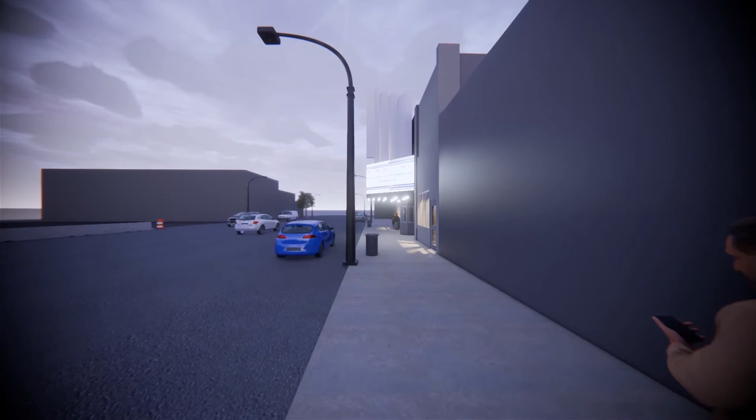About a year ago, we sat together in the Fox Theater and made our first presentation to a gathering of residents interested in seeing the grand old theater transformed for the 21st century. Perhaps you were there. If so, some parts of this presentation will seem familiar. Bear with us while we bring the others up to speed.

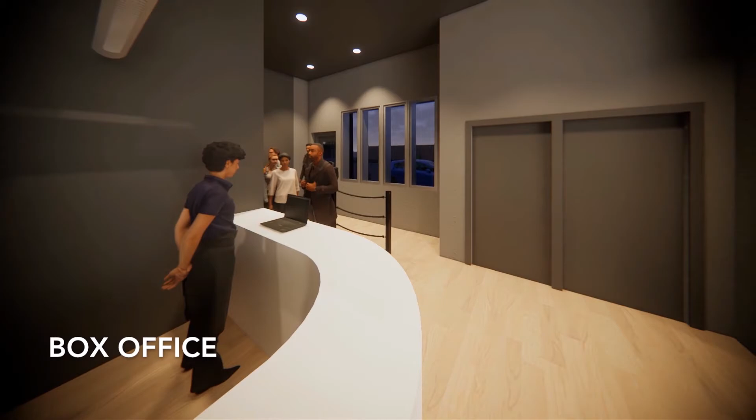There's a rich history that accompanies this theater, and we'd like to make sure you know all about it. We'd also like to share with you the considerations that we used to create the designs you will see. For those of you just joining the process, welcome aboard. There is surely room for all of you.

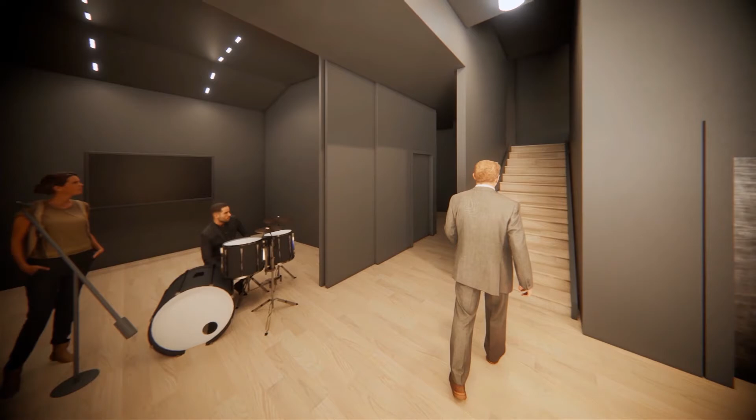We listened to your comments and concerns, and tonight have a series of 3 concepts to show you that will hopefully bring us one step closer to the transformation of the theater that you want to see.

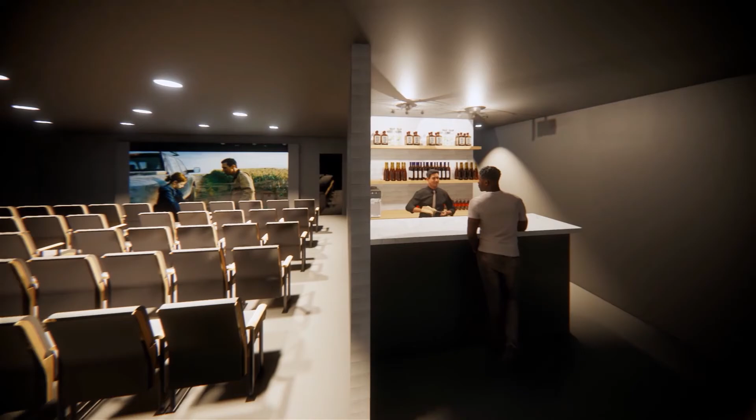I wish we could all be together in the auditorium tonight to allow our imaginations to run wild. But even though sitting in a theater together seems a long way off these days, with a little work now, we can use this downtime to refine our concepts, secure funding, and get this building ready for its sequel.

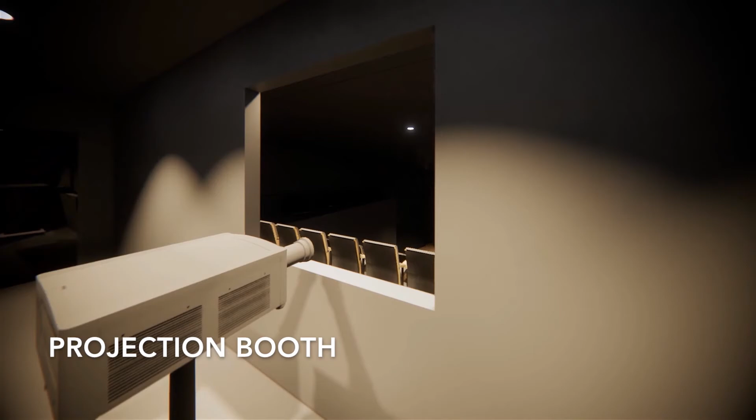We will look at 3 concepts. One with minimum changes to the footprint, but with modern restrooms and other amenities for the comfort of our guests. We will also look at a scheme with a more deliberate series of interventions, all within the confines of the existing building. Finally, we will present to you a scheme that not only includes a major theater renovation, but also an addition, making way for a future theater complex that will serve as a conference center and event center as well, serving a wide variety of needs for the community.

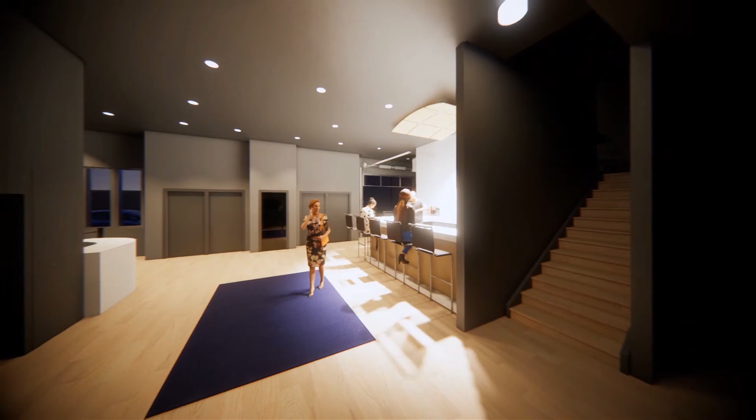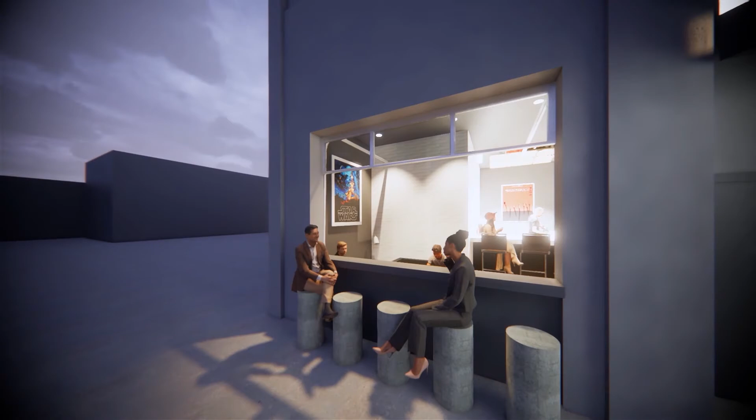We will also entice you with the thought of an outdoor theater, just the ticket for a warm summer night under the stars with an old family favorite on the big screen. Think of it, kids running around while mom and dad recite every line from a movie. And then settling down on a blanket or sprawled out on the lawn, the smell of popcorn and hot cocoa filling the air, while passers-by slow their cars down to see if they can guess the name of the movie just by the image on the screen.

This is the new Fox Theater in Walsenburg, and we're glad you could make it.

In order for the Fox Theater to remain viable in the future, we need to find better ways for it to make money. Primary among these objectives is flexibility. We'd like to be able to toggle between movies and live performances. We'd also like to enhance the visitor experience with better food, maybe a cafe, and concessions related to either the performance or the film being shown.

We'd also like to give people multiple reasons to visit, not just for a movie, but maybe some live music in the cafe and the lounge area of the lobby. We'd also need a smaller cinema for showings of new releases after they've been screened several times and they were playing to like a half-empty house or less.

Also, there's a need for a backstage green room for live performers to wait before their act or after the act is over. Finally, we'd like the renovated facility to become a hub of activity for the entire community. Perhaps you drive by on an evening and see something going on in the lobby, a performer you know of, and you want to stop and join in the party.

In addition to traditional performance and theatrical events, the theater could be made available for trade shows, exhibitions, and art shows, as well as for public meetings, much as it's used today. In the future, perhaps, a conference and event facility might be developed, which would allow those sorts of events to go on without disrupting film showing schedules.

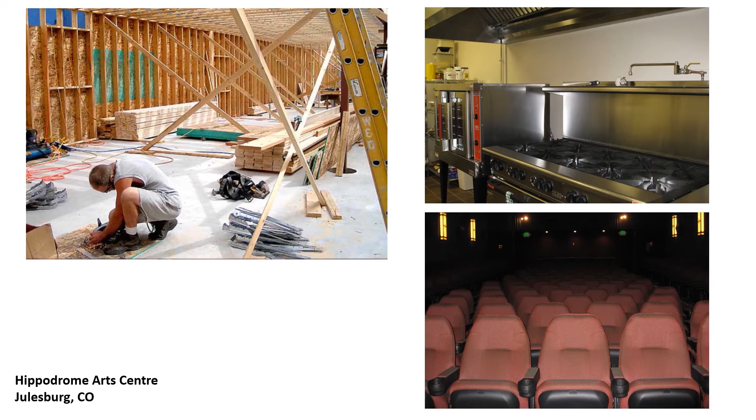In 2012, the lobby and concession stand took on a whole new appearance as both were completely remodeled. And in 2013, the digital age arrived as the Hippodrome made the conversion from the carbon arc to the new projector system. Today, the Hippodrome Arts Centre continues as a centerpiece of community life and activities.

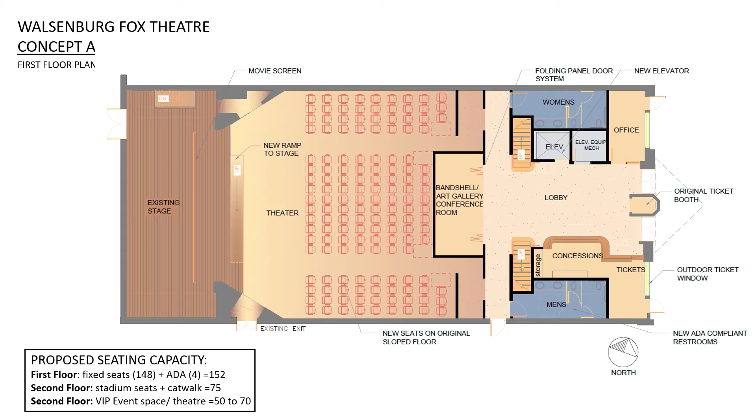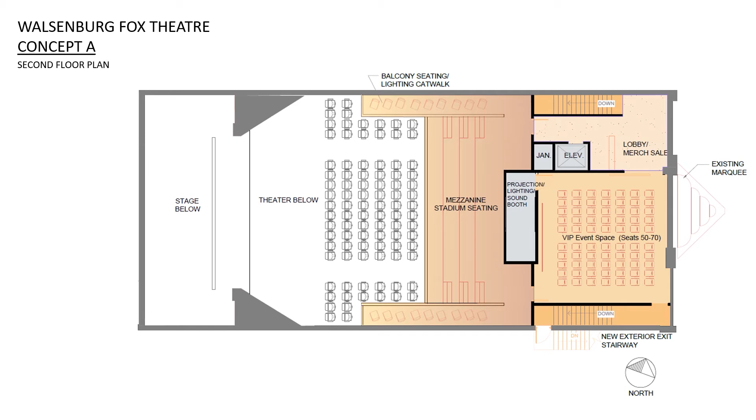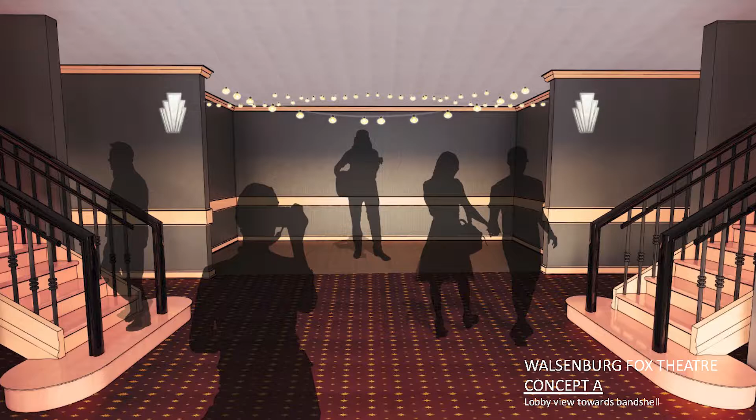This conceptual image provides a snapshot of the lobby experience and the proposed bandshell that would open up, expanding the lobby space, allowing patrons to enjoy pre-function activities before the main event in the theater. The bandshell could be used as an art gallery, or closed off and used as a conference room or small classroom. The lobby decor and stairs would be a nod to the theater's earlier Art Deco appearance and elegant ambiance.

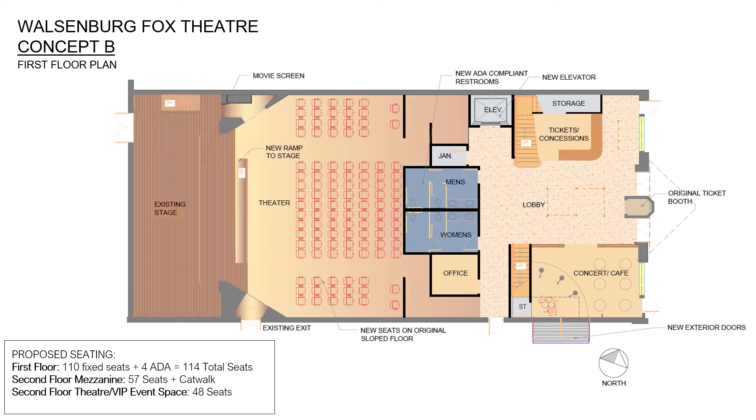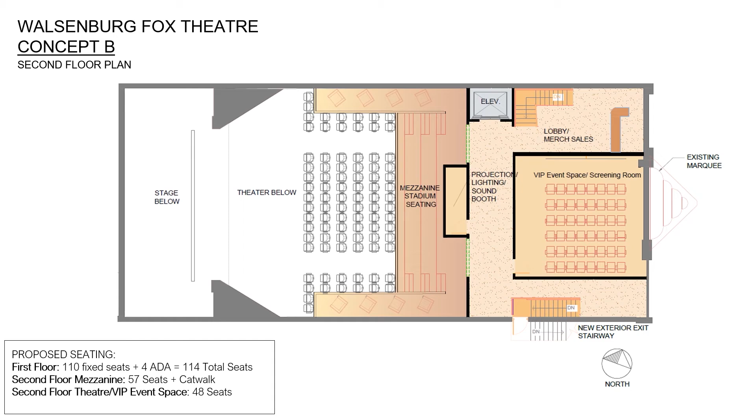In the main theater space, we have 110 seats available for viewership, with an additional 4 seating for ADA access. Access to the second floor includes the grand staircase, as well as the elevator and additional staircase on the bottom of the floor plan. The second floor has a smaller screening room that can hold 48 individuals for a more private screening. On the second floor, there's also a mezzanine stadium seating that allows 57 additional viewers to look out on the stage below to the main theater space.

On the southeast corner of the first floor, we have the multi-purpose performance stage. This area could be utilized for events such as music, comedy, or a lecture series. There is space available in this area for direct viewership, as well as low partition walls, allowing the event to spill into the lobby area if desired. There's also doors leading out to the outdoor theater, connecting these 2 spaces.

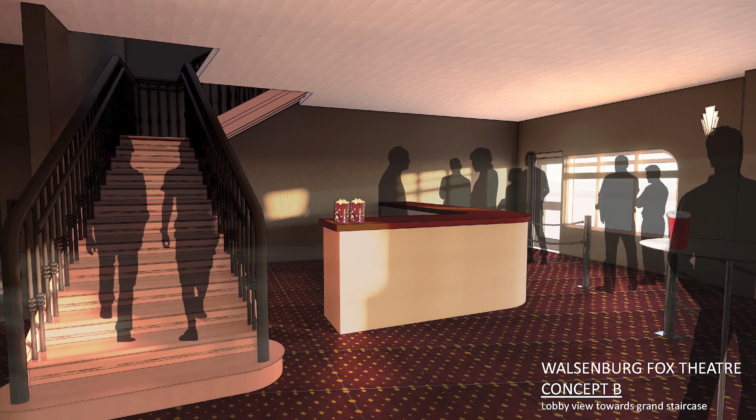Upon entering the theater, on the right-hand side is the grand staircase and ticket counter. This is where service would be for ticketing as well as concessions, and the grand staircase would be the main access to the second floor of the theater.

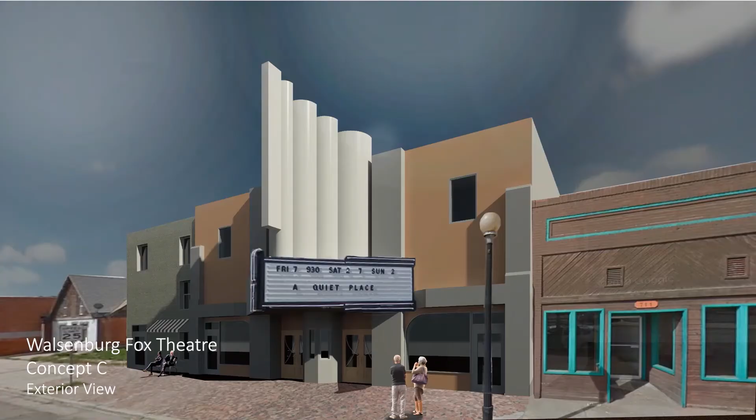This is a street view of what the new theater would look like with the addition built next to the Fox. We've added a storefront look to mimic the old Fox style. It also has windows that allow natural light into the circulation staircase and lobby on the first floor, though it won't have street access for the restrooms and elevator due to a control point issue.

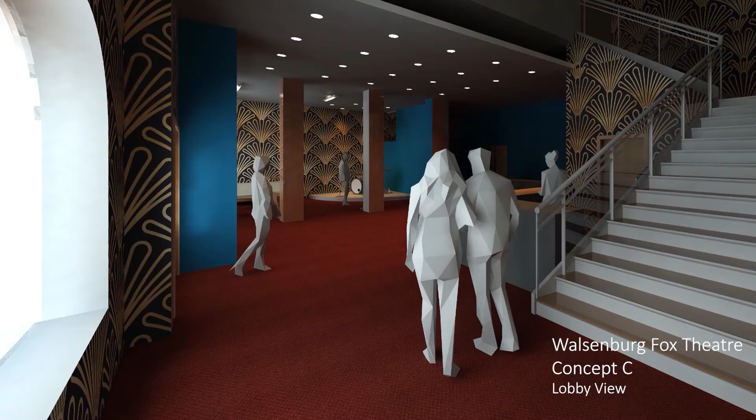This is a view of the new lobby, showing the new staircase to the second level and the stage area on the opposite side. This open floor plan allows the cafe or performance space to take up as much or as little space as needed depending on events. This room emphasizes the Art Deco history of the theater through colors and materials representative of that time.

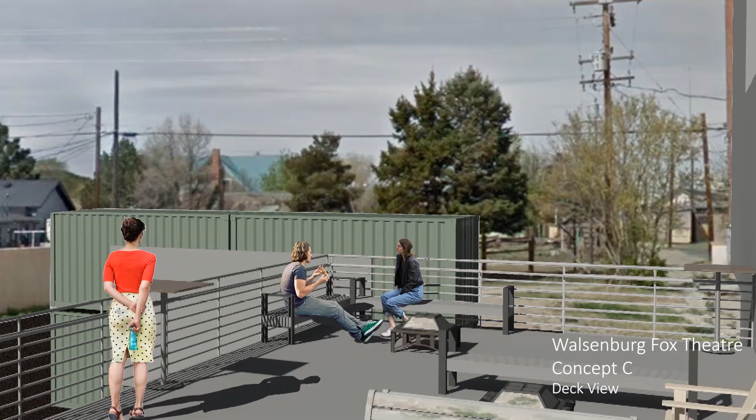The rooftop deck adds more space for viewing for the garden theater. It would have seating and tables so people can enjoy food up there, accessible from both the garden theater and the Fox, controlled depending on the weather.

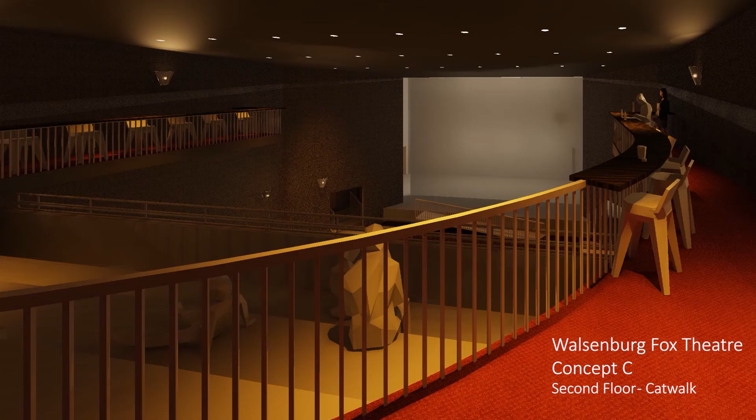The second floor would look something like this, with much more flexible space and seating along the catwalks. In the balcony, it would be more like stadium style seating with no assigned chairs, so you could take more or less space.

The marquee is a recognized landmark, and we want to make sure it remains unchanged and continues to stand out in our design. When we add Phase 1, which includes the new stair, elevator, and restrooms, we want to make sure the facade design complements the theater and the rest of the streetscape.

We will look into the theater's Art Deco elements and overall facade composition for designing within the historic context, and we will differentiate between the old and new with a change in exterior materials and colors, while introducing new storefront and awnings along the street to reinforce the established building edge and pedestrian scale. Additionally, connecting the sidewalks between the theater and the new building, including planters, seating, and the brick in front of the theater, will help promote pedestrian interaction and activity.